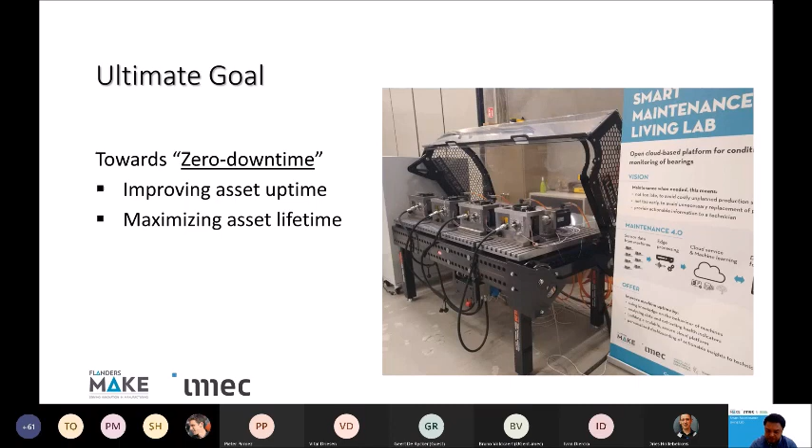So why do we do this maintenance? The ultimate goal of maintenance is to achieve zero downtime. And how to do that? We need to improve the asset uptime and maximize the asset lifetime. There are a number of maintenance strategies already implemented in industry for years.

Here I just show you two maintenance strategies: preventive maintenance and predictive maintenance. As you can see, preventive maintenance is still dominating in the industry, and predictive maintenance is gaining more attention, but compared to preventive maintenance, predictive maintenance implementation is still limited. This is a survey between 2017 and 2018, and the reason why the implementation of predictive maintenance is so limited, as you can see here, are the challenges.

The major challenge is the lack of resources and staff, and the second one is the lack of understanding of new maintenance technologies, and so on. If you cluster them, we can have an issue from the management point of view, and an issue from the technological point of view.

This webinar is not about how we tackle this from the management point of view, but we try to tackle this from the technological point of view. Of course, there is a link between the technological point of view and the management point of view.

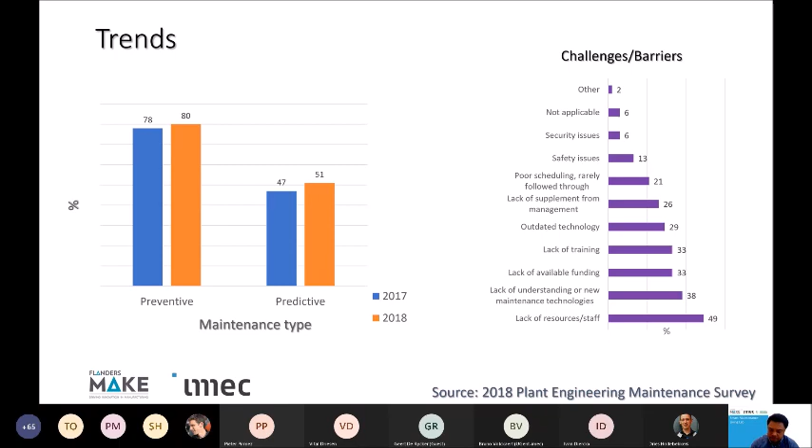In 2017, PricewaterhouseCoopers and Mainnovation released a report, and they classify predictive maintenance into 4 levels. The first level is about visual inspections, which is the simple technology that we can use for PDM. The second level uses instruments with some interpretation from an expert. The third level is more complex, with more technologies.

So we use a real-time condition monitoring system, but the interpretation still requires some expert knowledge. The fourth level, called PDM 4.0, is equipped with predictive analytics for more objective decision making. A survey in 2017 covered 280 companies in Belgium, Germany, and the Netherlands.

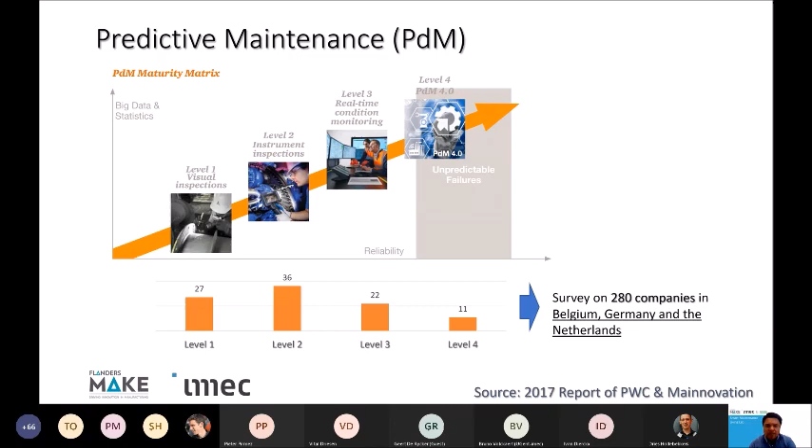As you can see, the majority of these companies still implement PDM with basic technology, instruments with periodic inspection, and only 11% of these companies already implement predictive analytics, so it is very limited. From what we experience working with companies, we noticed that many companies struggle with how to jump to predictive maintenance. That's why it's very important to have a systematic methodology that can guarantee success.

So that's why you do things right the first time. And from our experience, we already have a way of working where the first step is to do criticality analysis, because this is strongly linked to the business case.

So in order to do this in an objective way, we need some data, for instance maintenance records, this is important, production data, engineering data, logistics data. Based on this data, we have a way to analyze them, and then we can determine the critical assets.

In our production plant we also need to identify the failure modes. Why? Because the failure modes help us identify what kind of technologies we need to use.

On the market, there are a number of technologies, but we have to be selective there, to make sure there is a trade-off between the cost and the benefit.

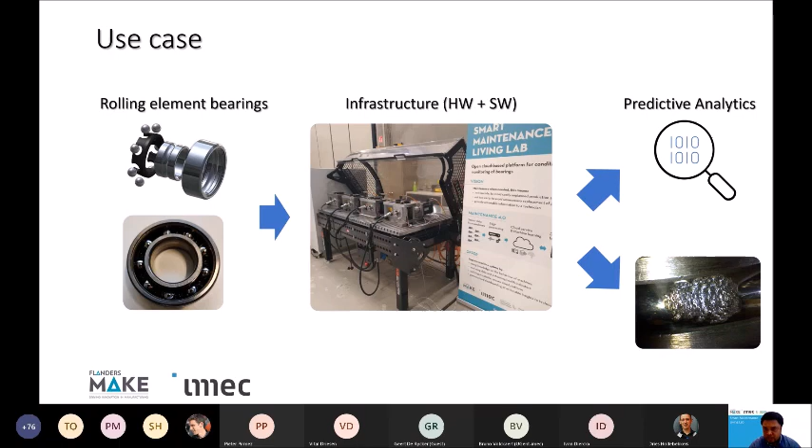Through this project, basically we create an open ecosystem, where different organizations from different sectors, research and development organizations like Flanders Make and imec, and technology providers.

Like a sensor provider, edge computing platform provider, and so on, and maintenance service companies who provide service to end users, can collaborate. Of course the end user can also interact through this smart maintenance living lab.

Because there are some companies who want to do maintenance themselves. They can also benefit from this. So what's in it for you?

Basically, we have this infrastructure, so we can perform customized testing. So if you develop technologies related to, in this case, bearings, you can come to us. You can test your technologies, and we also have this low-cost edge hardware.

So if, for instance, you want to test in your production plant, we can bring it to your production plant. We can acquire data and so on.

And also we have open algorithms, so we know how these algorithms work. So we can also tailor these algorithms to your specific applications. And then we have this cloud service and machine learning models.

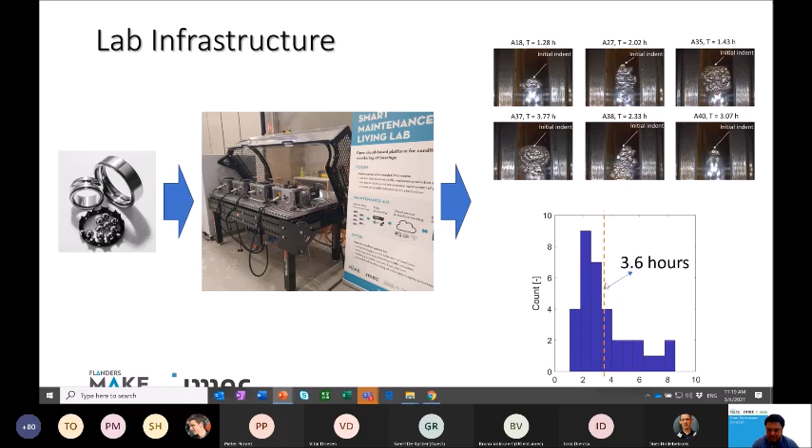At the edge, it's important to select relevant technologies, relevant sensors. That's why imposing domain knowledge is very crucial there, because if we select the wrong sensors, it will propagate to the end, and basically we will capture nothing, and then we have an issue. So based on our experience and understanding of machines, for these specific applications we have imposed some requirements: the dynamic range of the sensor at least 50G, and the frequency bandwidth at least 10 kilohertz.

In the previous project, we selected low-cost MEMS accelerometers. It's around 57 euro per unit, while high-end piezo-based accelerometers you can find on the market at approximately 150 euro per unit. But bear in mind that the high-end accelerometers require specific signal conditioning, which is a lot more expensive than the signal conditioning for a low-cost MEMS accelerometer.

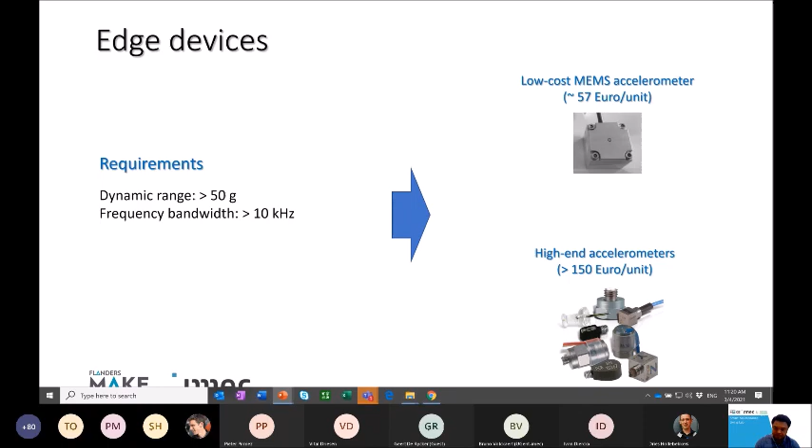And then for the edge computing platform, we have defined the specifications. This platform is based on an industrial PC and is also equipped with acquisition modules, so we can control in real time and also acquire data. For vibration data, we can acquire with a sampling frequency up to 50 kilohertz. But for other signals like temperature and loads, we typically acquire at a sampling frequency of 1 kilohertz.

Right. So, okay, we have the sensors. We have a data acquisition platform at the edge. Now we need an algorithm, a robust and reliable algorithm to transform this raw data to useful information. And here, based on our physical insights, we have developed an algorithm to pre-process vibration data.

So as you can see, vibration data is very complex. It's a result of different machines. In rotating machines, you can find a lot of machine elements, bearings, gears, shafts, screws, and also random noise, for instance. And typically, the bearing-related signal is very weak compared to the other signals. That's why you need certain signal pre-processing steps to ensure that you extract information related to the bearing faults.

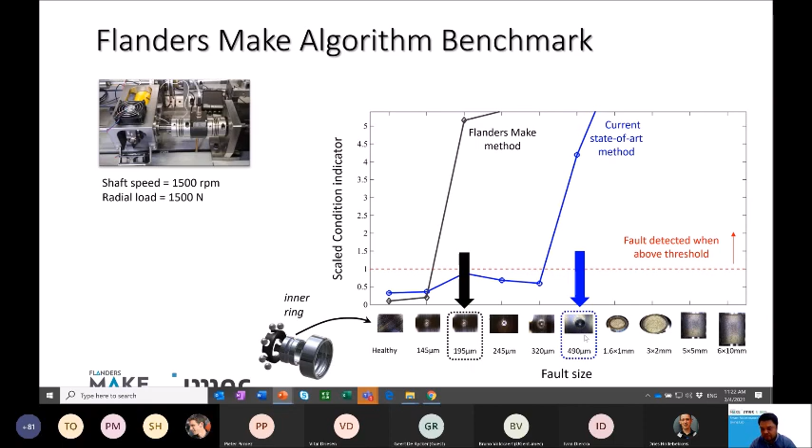Okay, so we collected raw data. Typically, this raw data has about 100,000 data points, and we acquire it periodically or maybe continuously, depending on your applications. Then we need to transform this data with the algorithms that I presented earlier to extract features or health indicators or condition indicators, right? In this case, we transform from 100,000 data points into only 6 values per acquisition.

For an expert, this is already information because they know what's going on here. But for a non-expert, it's not obvious. That's why we need to transform these features or condition indicators into actionable information. Then we apply AI-based feature selection and transformations, and now we have this health index, which is obvious for a human. So it's easy to interpret.

So the health index is a value between 0 and 1. If it's about 1, it's still healthy. If it drops, then it's degrading, and we can define colors to indicate it is healthy, degraded, or faulty to replace. So once we have this, an operator can easily take an action.

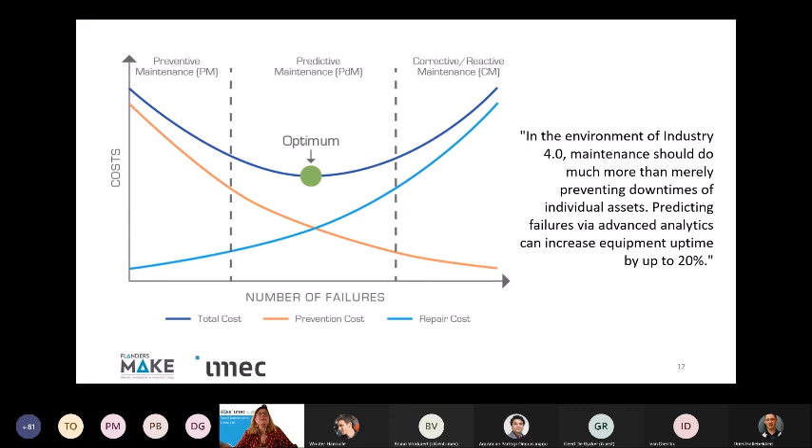As Guzman already told, there's a shift towards predictive maintenance, as it's the ideal trade-off between corrective maintenance, where there's a huge repair cost, and preventive maintenance, where we replace components even if they would not fail in the near future. So when shifting towards predictive maintenance, you can increase the equipment uptime by up to 20%. It additionally allows for optimally scheduling your maintenance plans.

It allows to plan for spare components, but more importantly, you can see the remaining useful life and act upon that by reconfiguring the system to prolong component life. The definition of predictive maintenance in Latin or prognostics in Greek is that you determine the remaining useful life, and that's of course the scope of our part within this living lab.

Prognostics and health management can be done in two different approaches. One is the model-based approach, where you use analytical or physical models to approximate components' behavioral and degradation. The benefit is high accuracy and the capability of simulating diverse scenarios. However, a big downside is that it's mostly used to model healthy behavior, as the real degradation processes are stochastic and therefore hard to model.

As a result of the increased use of sensors, data-driven techniques came to the forefront. These data-driven or machine learning approaches are models that approximate the component's behavior and degradation via machine learning, with the benefit that no expert knowledge is needed and that the degradation and failures themselves are inferred from the data without even having to specify the failure type.

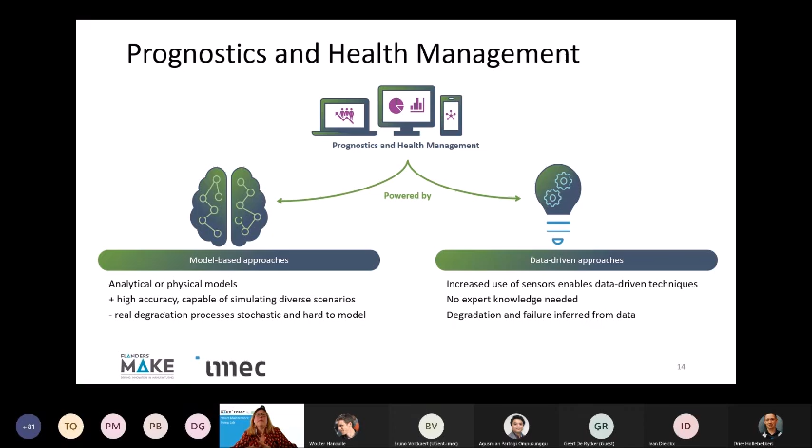The state-of-the-art solutions require lots of data and feature engineering, and cannot deal with conditions that are not captured in the data, and that is what we will solve here in this living lab. So the goal was to design health indicators and predict the remaining useful life, while being able to deal with variations in the setup, different bearing types, and different operational conditions. And we wanted to design generic indicators.

We did a two-staged approach, and first we designed the health index, as already indicated in UGent's part. We designed machine learning models to detect the degradation onset. The health index that we outputted from our models is a value bounded between 0 and 1, so it's easy to interpret, and it can be used as a threshold. We expect monotonic behavior as the mechanical components experience gradual degradation and normally no recovery.

For this health index model, we assume the first samples of the data as collected by Flanders Make to be fully healthy, and the last samples of the bearings that failed, we labeled them as unhealthy. Then we trained a weak model with only a few labeled samples to predict for all the other samples. We did, of course, cross-validation across bearings to assess the generalization.

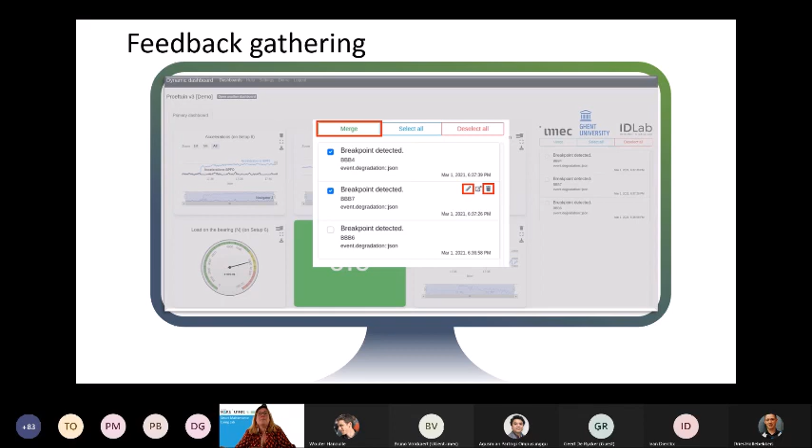We also provided a possibility to capture feedback, so the user can merge related events, can relabel events to give more meaning to the event label, or he can delete if something wrong would have been predicted. That feedback is then again pushed into Obelisk and can be adopted by the machine learning algorithms to optimize them. This functionality is disabled in your dashboard purely for demonstration purposes.

So to conclude the part of my colleague Bruno Volckaert and me, we presented how the data generated by the fleet that was set up by Flanders Make and the features they calculated, they were ingested into the cloud, which is an open, flexible and scalable architecture as presented by my colleague. And then that data is used by our machine learning algorithms that give an indication of the health of the bearing, and when the degradation is detected, the remaining useful life is predicted from that moment on.

All the machine learning output, but also the features as calculated by Flanders Make can be dynamically visualized in our dashboard, and whenever a breakpoint is detected, also an event-driven dashboard is automatically generated. Both Obelisk as well as the dashboard are generic components and are not restricted to this use case.

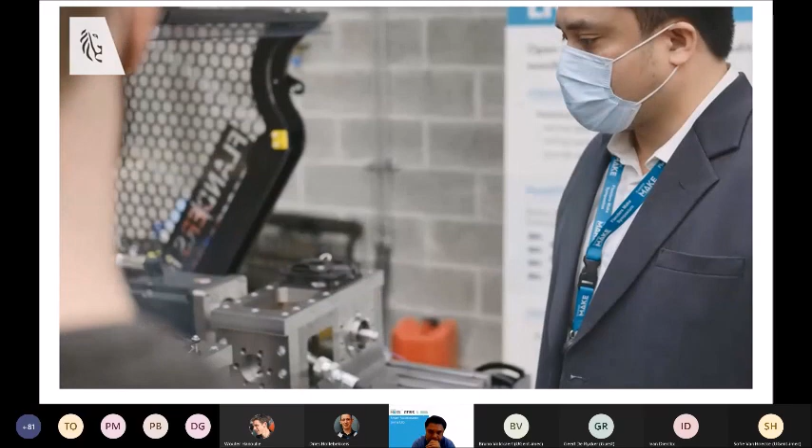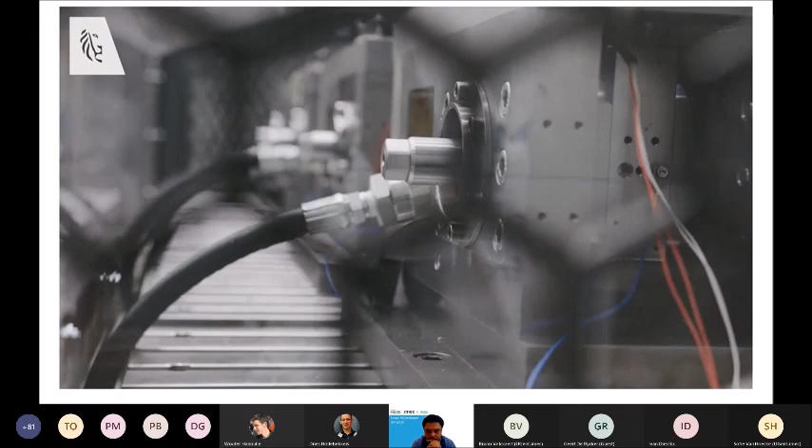We're in the lab today with the setups that we use to test rolling element bearings. An example of one of these bearings is this inner ring. So we have 7 identical setups here that we use to perform accelerated lifetime tests. This means that we really try to degrade the bearing in 1 working day.

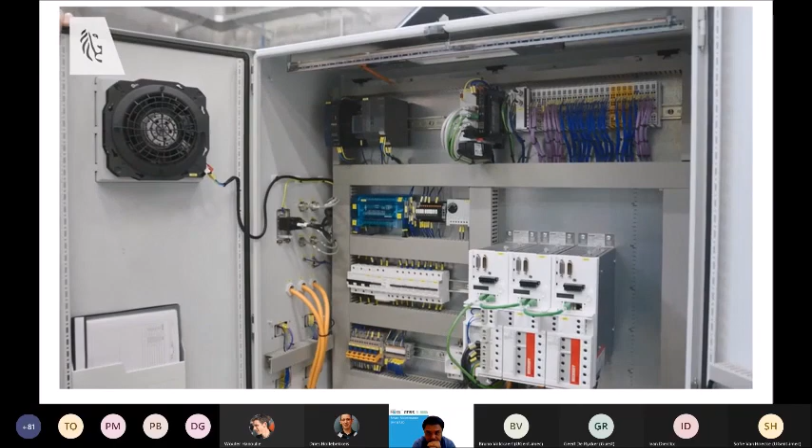During these tests, we try to capture as much data as we can. We capture the temperature data, acceleration data, and this all locally through a PLC system. And this PLC system then acts as an edge computing device where we calculate a set of features, and this set of features is then pushed to the cloud to visualize the data.

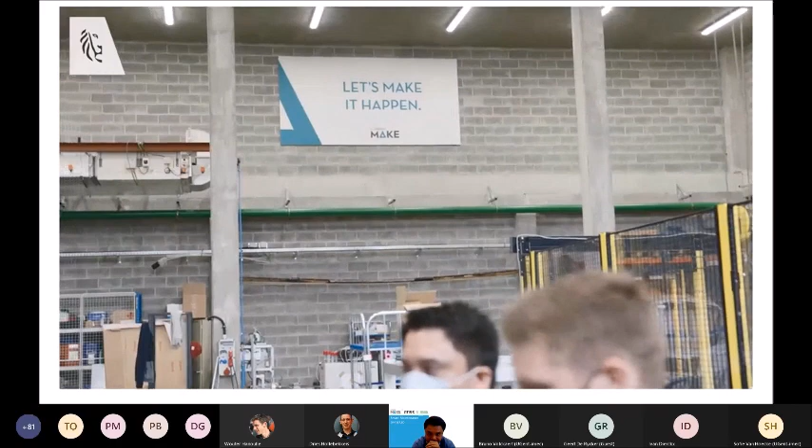imec created the Obelisk platform. It's a scalable container-based cloud backend in which the smart maintenance monitored data and features are ingested.

On the IDLab cloud environment, two machine learning models are deployed: one for health assessment and breakpoint detection, and one for remaining useful life prediction. The health assessment is a prediction between 1 and 0 that indicates the health of the rolling element bearing.

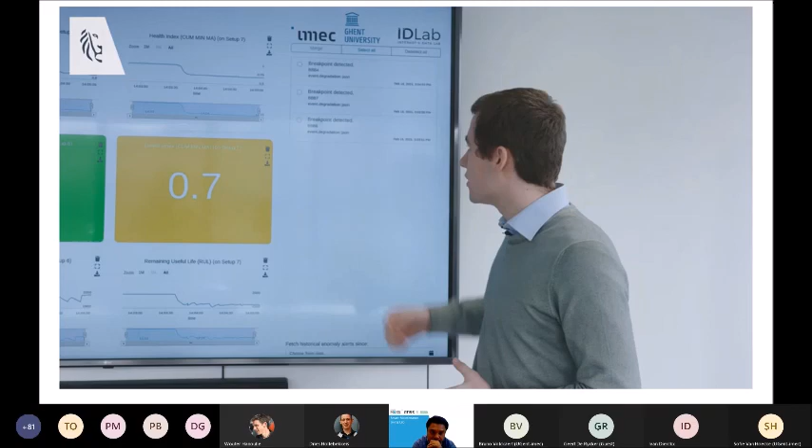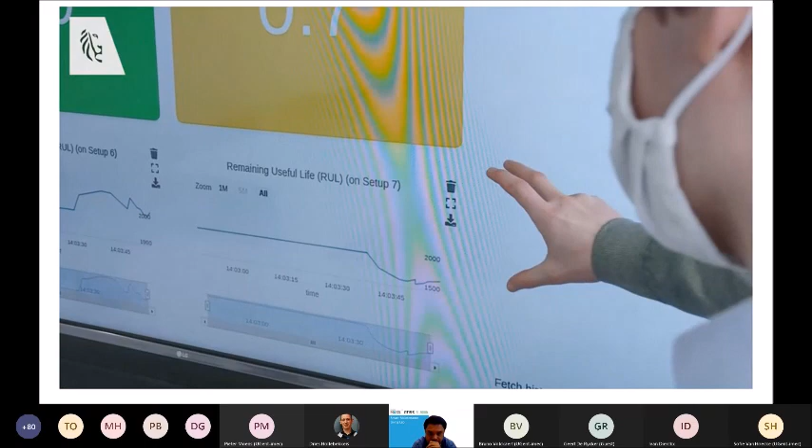This prediction helps with two things: breakpoint detection, and estimation of the degradation rate of the bearing. Once a breakpoint has been detected, an event is generated and pushed back into the Obelisk cloud platform. From this moment on, the remaining useful life is predicted as the time in seconds until the bearing will eventually break down. This prediction allows scheduling of maintenance and a move from a preventive strategy towards predictive maintenance.

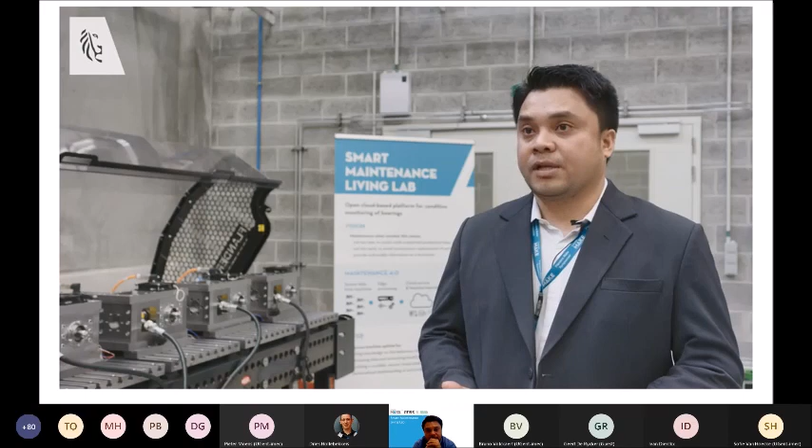The Smart Maintenance Living Lab project creates an open ecosystem that enables companies from different sectors to collaborate, for example R&D companies, technology providers, maintenance companies, or manufacturing companies as the end users.

Right, in the smart maintenance. Okay, so now I will give a company testimony. So I expect Anirudh from Bosch. I don't know, Anirudh, if you are still there. Yes, Agusmian, please, yes, so this is the testimony prepared by...

Colleagues from Robert Bosch production plant in Tienen have followed this way of working that I presented earlier. They are currently working on a project of condition-based maintenance on fast-moving linear axes. With vibration analysis, they want to detect and predict upcoming problems with tooth belt, gearbox, bearings, and so on.

So we set up these collaborations with new vendors, and we really followed this workflow. Now we are in the feasibility study, and hopefully the feasibility study shows that it is feasible to implement condition-based maintenance or predictive maintenance in their production plant with a high success rate.

Yeah, I don't know if you have additional remarks about it, Anirudh. Right now, no. Only, the thing is that we are working with linear bearings, like you had worked with rotary bearings before. Now that we are working with linear bearings, hopefully we make good progress through the project finally. Okay, thank you, Anirudh.